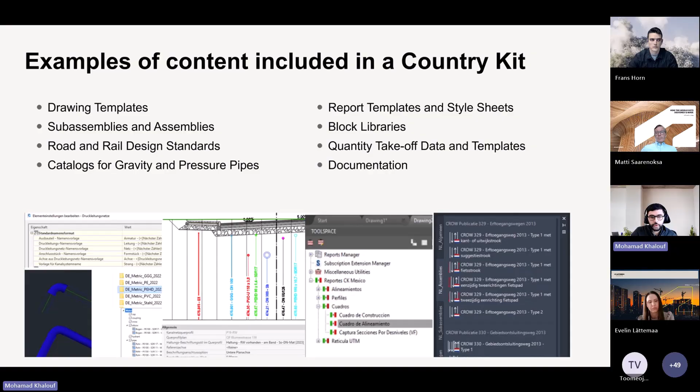Some examples of content that can be included in a country kit are drawing templates, which we have worked with in this country kit. It can be sub-assemblies and assemblies. It can be road and rail design standards. It can be catalogs, for example, for pipe networks and so on. And we are really happy to get your feedback on what would be most interesting for you to develop in the coming country kits and in this country kit.

So a country kit is a supplemental package that the user adds onto the core product. It is content files containing local engineering standards. And it's developed by external partners who have knowledge of the local market, which is important to make it as good as possible. It's not intended to fill any feature gaps in the core product, if there are. And it's not a language package, but it's more like content in the local language.

And this is the coverage of Civil 3D country kits worldwide. And we're very happy to now have developed something for Finland as well.

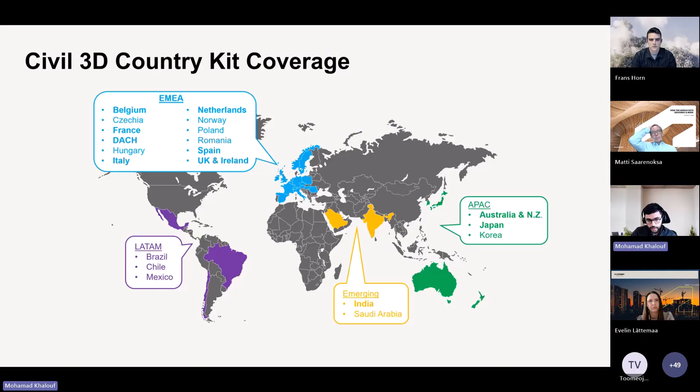In this release. So now after we understood about country kits, how these are implemented into Civil 3D, it's important to know that Civil 3D is part of the AEC collection where we have 20 different tools, including Revit, Docs, and some other software. Civil 3D basically is in the part of BIM infrastructure in this category with InfraWorks, Navisworks and Docs, for example, and some other tools are spread through all these different categories.

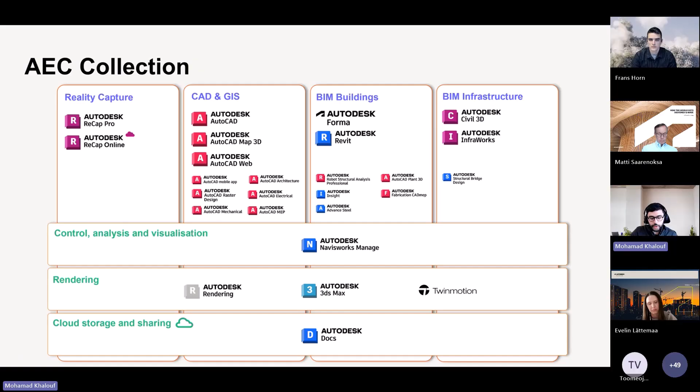And I'll be talking about Docs a little bit more, where you can share your files and you can store your files and communicate with your team members and so on. So this is important to know as well. AutoCAD, AutoCAD Map 3D, and Civil 3D are built on top of each other. They are built on the same base, on the same foundation. So AutoCAD and AutoCAD Map are included in Civil 3D. You have more functionalities in Civil 3D.

So Civil 3D is a civil engineering platform for infrastructure, and it consists of smart Civil 3D elements like alignments for the roads or rails, profile, surfaces, etc. And why is this important to understand? Because when we say smart, it's because you can include, for example, Finnish design standards into your alignment for the road, to make it compatible with the market. And this will, of course, automate the work.

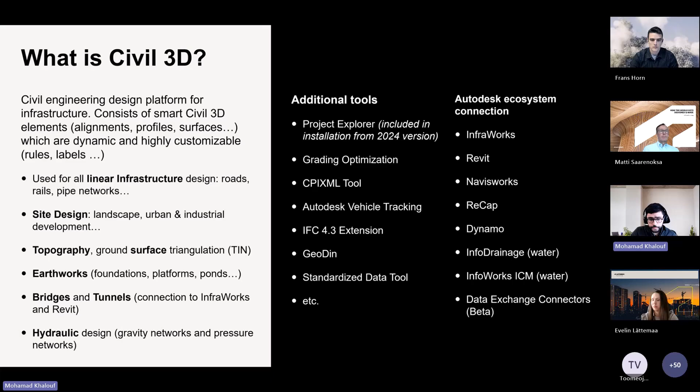So Civil 3D is used for linear infrastructure like roads, rails, pipe networks, for site design, for topography, the surface, earthworks, and so on. And we have additional tools in Civil 3D, as you can see, like Project Explorer, grading optimization, IFC 4.3 extension. These help you a lot in your workflows. So I wanted to mention some of the tools that might be interesting for Finland because there are many tools. For example, you have Dynamo for visual programming.

If you are a developer, you have the .NET options. There are different extensions for Civil 3D, and the CountryKit is one extension. You have vehicle tracking, grading optimization, and other tools. The Content Catalog for Civil 3D is where you save all your blocks, like a library.

Another important connection to Civil 3D is the Autodesk Connectors for ArcGIS. This is very important for civil engineers to know the project's existing conditions, how it looks in your project. That's why we have integrated BIM, which is Civil 3D, with GIS. This way, you can connect the Autodesk Construction Cloud or Docs with ArcGIS, which is the Esri part, the GIS part—so BIM and GIS together. I wanted to show you how it looks, if it could be interesting for your projects.

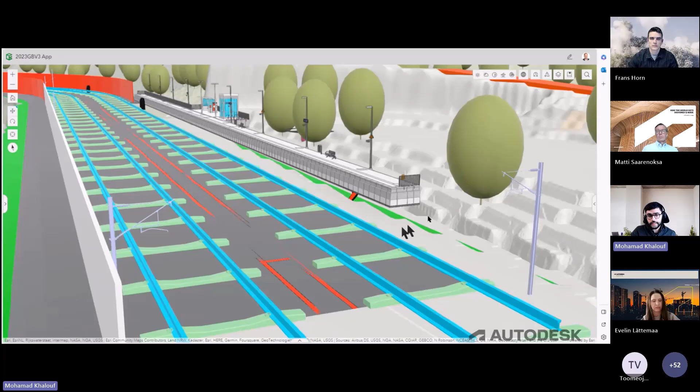So this is a GeoBIM application. It contains the vegetation, the parcels, the surfaces, the utilities. To the right is Docs, where you share or store your files, and you can access it directly from GIS. So you're connected in both GIS and BIM.

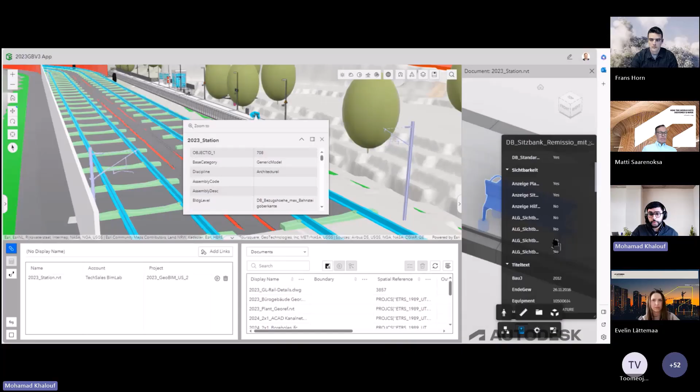The BIM contains all your BIM models, and you can see all of the properties included. You get all the information here, and the links as well.

One more important tool that might be used for the Finnish market is the Structure Details tool. This is included in the Swedish CountryKit and the Norwegian CountryKit. If this is something you would like to use for Finland, please vote at the end of the presentation on Slido. Basically, if you have a pipe network or a structure, it will give you a drawing ready for the construction site, with all the information needed for the construction site and installation.

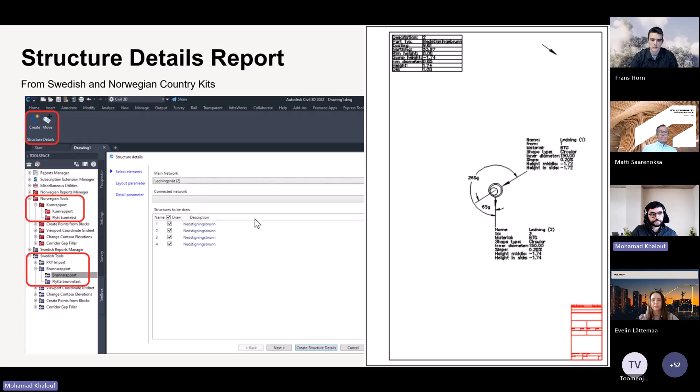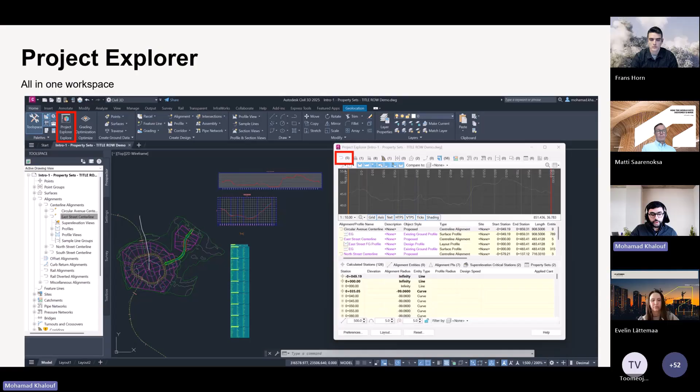Also, an important tool included in Civil 3D since 2024 is the Project Explorer. Here you can create reports and edit. It's an all-in-one workspace—you can access it from here. In this example, we have five different alignments. If I wanted to do it the usual way from Toolspace, I would need to go to the exact alignment, to the exact profile. But in Project Explorer, you can see it's an all-in-one workspace.

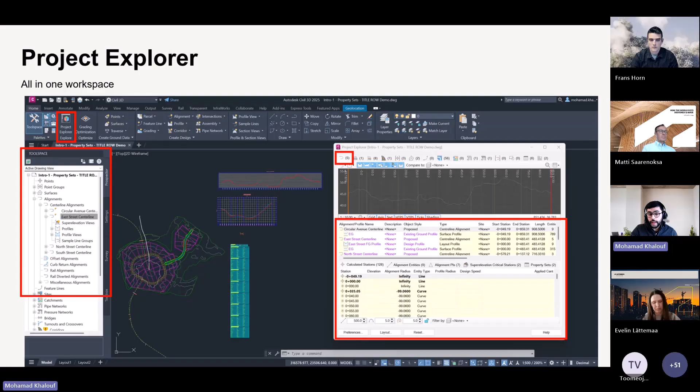Basically, you can report on whatever entities you want. You can make reports like PDF or Excel files, customized to your company. You do not need any other extensions—it's included in Civil 3D, but many people don't know about it. And this gives you better understanding because everything is included in one place, easily.

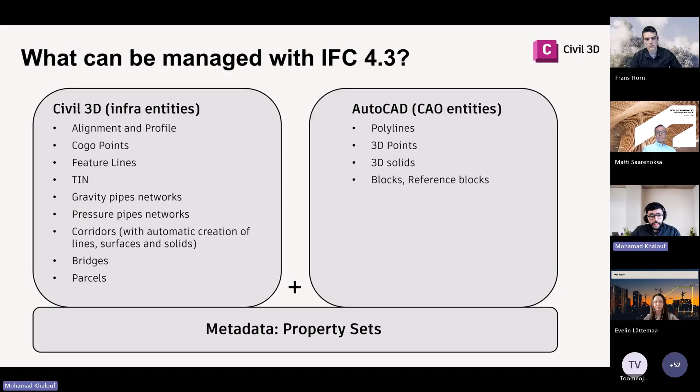One more thing included in Civil 3D that might be interesting for Finland is IFC. To give background, when IFC 2x3 started, we only had IFC for building, but then with IFC 4.3 we got IFC for railway, road, marine facilities, and tunnel in 4.4. These are the entities that can be included in IFC 4.3. You can now export alignments, profiles, Cogo points, feature lines, TIN surfaces, and so on. You also have some AutoCAD entities like polylines, 3D points, 3D solids, and so on. Metadata is included in all of this, which is the property sets—all the information about your objects.

So this was my part of the presentation. I just wanted to show you how to access the beta. Now we are in the beta phase, the testing phase, where we would like you to test it. It is in the Autodesk Infrastructure Futures.

If you let me share my screen, I hope you see it. It is in here—I will share the link with you. You need to sign in or create an account to go into here. Sign in very easily, as I will show you where the beta is now included.

We released this just today or yesterday, so it's taking some time. If I go to Autodesk Infrastructure Futures and then Content, you should come to the CountryKit, and you should be able to download it. As you can see, you have the documentation about everything that's included, and you have the content here. This is the documentation, and this is how it looks. Please go ahead and take a look.

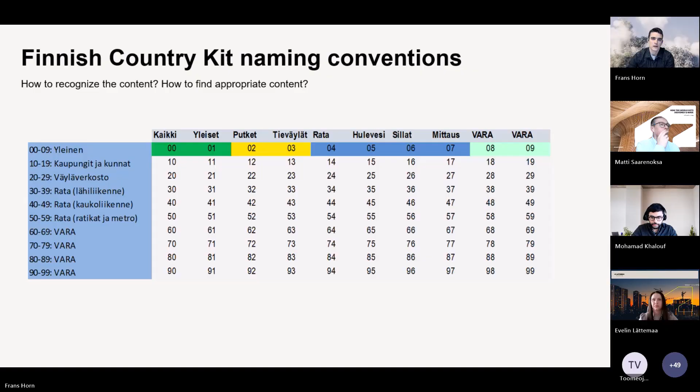Mohamad sanoi, että Civil 3D:tä ei voi käyttää ilman AutoCAD-toiminnallisuutta, tai oikeastaan hän sanoi, että se on rakennettu AutoCADin päälle, ja se tietenkin tarkoittaa, että kaikki mikä on AutoCADista, niin toimii Civil 3D:ssä. Käänteisesti se tarkoittaa, että meidän täytyy myös määritellä tiettyjä perussääntöjä näihin mittoihin, teksteihin, blokkeihin, ja niin päin pois. Siinä sisällössä on myös sellainen auttava kokoelma AutoCAD-sisältöä.

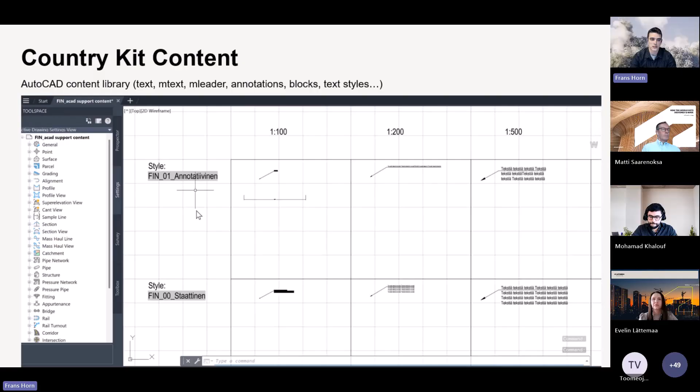En tule esittelemään kaikkia objektityyppejä tässä esityksessä, mitä on kehitetty, mutta pintapuolisesti joitain näistä ja sitten demossa sen, mitä ehdin.

Pintojen osalta, en nyt uskalla valehdella, kuinka monta eri pintatyyliä oli, mutta niitä on 10 ja 20 välillä. Nämä on sellaisia yleishyviä esitystapoja pinnoille.

Niissä on tosiaan kaksi eri lähestymistä. On se, missä on by block, eli kaikki objektit menee sille layerille, mille sen pinta-objekti on sijoittanut, ja sitten on sellainen esivalmistelluilla layereilla varustettu tyyli, missä pystyy esimerkiksi pinnan käyriä korostamaan eri viivatyypeillä tai eri viivapaksuuksilla, jos kokee tämän tarpeelliseksi.

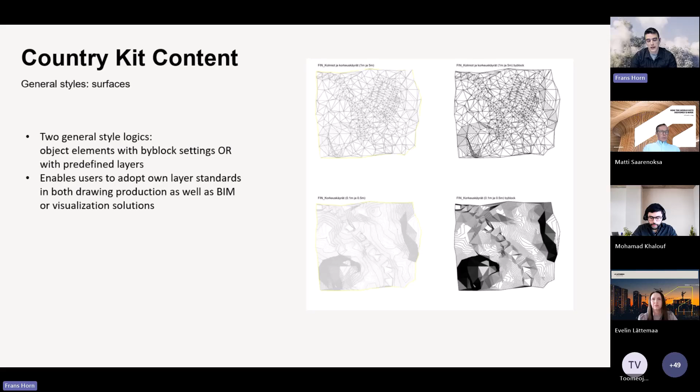Ja kuten aikaisemmin totesin, tämä lähestyminen minun näkemykseni mukaan tukee sitä, että IFC-eksportit yms. on vähän jäsennellympiä. Seuraava kokonaisuus on nämä peruslinjageometriat, eli puhutaan alignment-objekteista ja niihin liittyvistä section lineista.

Näitä tyylejä ei ole kovinkaan montaa ja se on harkitusti tehty. Idea näissä on ihan sama kuin aikaisemmin, eli siellä on esitystapoja tai tyylejä, jotka eksportin myötä käytännössä käyttäytyy kuten AutoCADin polyline. Ja sen lisäksi siellä on mittalinjatyyli, jossa mittalinjan eri osat on korostettu eri väreillä.

Sen sanon vielä tästä lähestymisestä, että ne värit, mitä tässä on, ne on tietenkin konsultista ja tilaajasta riippuvia, miten ne haluaa esittää. Ja sen layer-järjestelmän mukaan, mitä olen käyttänyt tässä, pitäisi olla hyvin helposti muokattavissa niin, että jos joku tietty konsultti tai tilaaja haluaa ne jossain tietyssä muodossa tai tietyllä värityksellä, sen pitäisi onnistua.

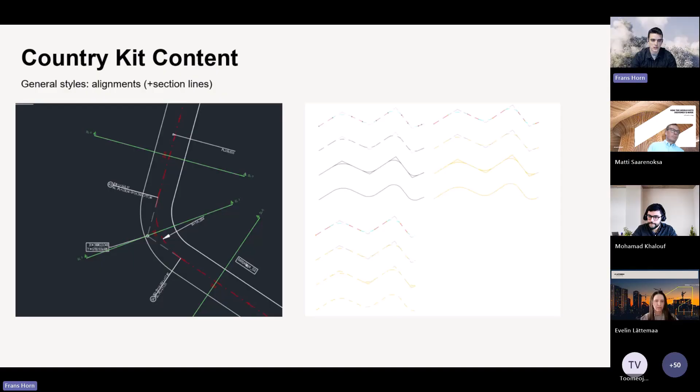Sitten puhutaan pituusleikkausnäkymistä. Nämä on sellaisia oman kokemukseni myötä - tämä on yleensä se, missä uusi Civil 3D-käyttäjä on heti sillä, että tämä ei näytä tutulta, tämä ei näytä suomalaiselta. Olen pyrkinyt valmistelemaan yleishyvät pituusleikkausnäkymät Civil 3D:stä, joiden ei pitäisi heti aiheuttaa sellaista kauhureaktiota.

Ne, jotka ei tunne Civil 3D:tä, ei välttämättä tiedä, että ne on reaktiivisia tai dynaamisia objekteja, mikä tarkoittaa, että kun niitä tyylejä muuttaa, niin esitystapa muuttuu. Ja olennainen osa tästä on katusuunnittelussa esimerkiksi tuttu tällainen pystyakselin korostaminen.

Ja tällaisia tyylejä, missä pystyakselia on korostettu - olikohan se nyt 2, 5 ja 10 kertaisesti - löytyy siitä template-kirjastosta. Tässä kuvassa on 6 identtistä pituusleikkausnäkymää samasta mittalinjasta, ja niillä on kaikilla eri esitystapa.

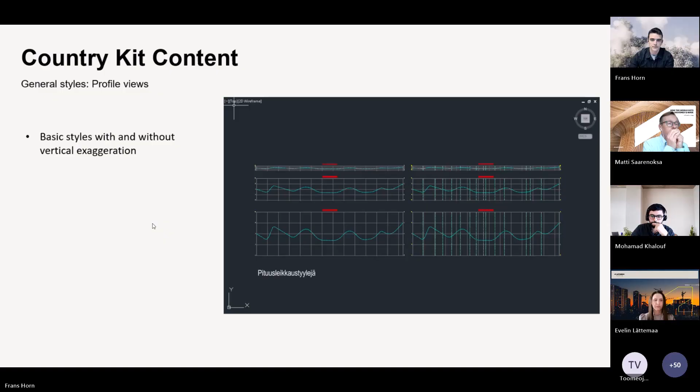Sitten päästään tasaustyyleihin, eli kun puhutaan tasauksista, se tarkoittaa Civil 3D-kielellä suunniteltua tasausta tai sitten mitattua tai pinnan ikään kuin käyrää. Näissä logiikka on ihan sama kuin mittalinjoissa, eli siellä on muutamia tyylejä, joissa suurin osa asetuksista on by block, mikä tarkoittaa, että ne käyttäytyy kuin polyline.

Ja tämän epäonnisen värivalinnan takia, ehkä tihrustamalla näette, tässä on sininen viiva, jolla on pistekatkoviiva, sininen viiva, jossa on yhtenäinen viiva, ja valkoinen viiva. Nämä on kaikki samalla tyylillä, mutta eri layer-asetuksilla ja eri viivatyyppiasetuksilla. Tämän pointti on tarjota mahdollisuus tehostaa piirustustuotantoa Civil 3D:n työkalulla.

Sitten vastaavasti löytyy tällainen suunnittelutyötä varten kehitetty tyyli, jossa geometrian eri tyypeillä on omat värityksensä. Ja ne väritykset on identtiset sitten mittalinjan esitystavan kanssa.

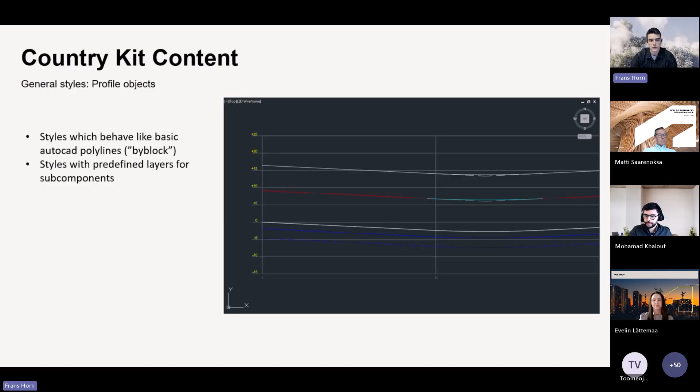Selkeä haaste tässä kehitystyössä Civil tai tämän CountryKitin kannalta on ollut putkikirjastot. Suomessa on tietty määrä esitystapavaatimuksia ja teknisiä määritelmiä, joita halutaan esittää piirustuksissa, ja niiden saavuttaminen perus Civil 3D-toiminnallisuuksilla on haastavaa, ei mitenkään mahdotonta, mutta haastavaa.

Ja peilaten siihen, mitä Mohamad kertoi maailmanlaajuisesti siitä, miten Civil 3D:tä käytetään, niin tosi moni markkina-alue on kehittänyt oman tällaisen niin sanotun pipe-katalogin, mikä tarkoittaa, että tällä tukitiedostolla, eli pipe-katalog, on speksattu, mitä putkia tällä markkina-alueella käytetään, mikä niiden nimi on, mitkä niiden ominaisuudet on. Se, mitä olen nyt kehittänyt tähän CountryKittiin, perustuu täysin siihen, mikä tulee Civil 3D:n asennuksen myötä.

Tällä disclaimerilla totean, että jos käytätte tätä pipekatalogia, osa näistä geometrioista, mitä se tuottaa, ei ole millintarkasti se, mitä putken määritelmä antaa ymmärtää. Mutta heitto ei ole merkittävä.

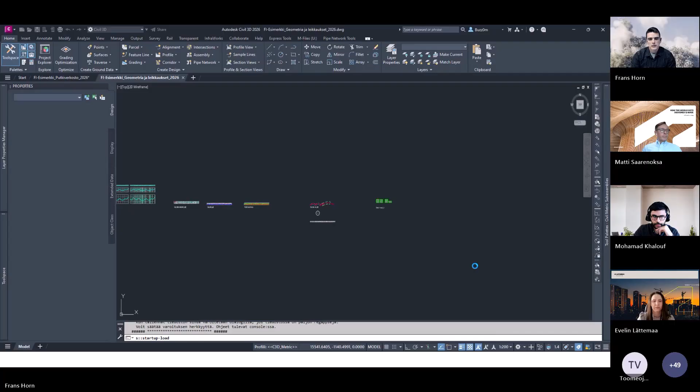Tämä on yleinen vinkki AutoCAD ja Civil 3D-käyttäjille, että täällä on kaikennäköistä mielenkiintoista myös muissa. Mutta kun asennus on onnistunut, löytyy tällainen FIN-hakemisto, jossa on FI-alkuisia esimerkkitiedostoja. Ensimmäiseksi avaan tämän geometrian leikkaukset.

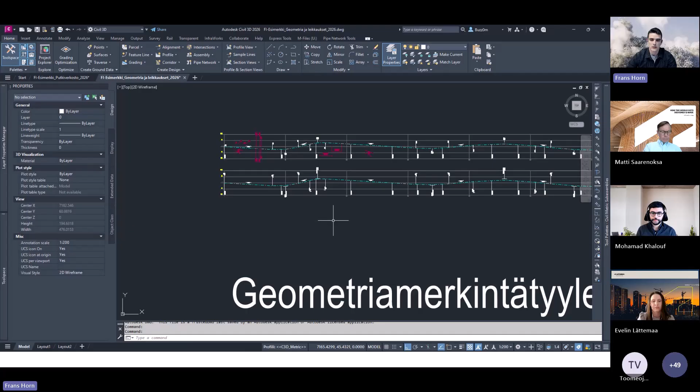Se, mitä tässä esimerkkitiedostossa on käytännössä, on sama sisältö, mikä oli mun slideissa. Täällä on mittalinjatyylit, pituusleikkaustyylit, merkintä-esimerkkejä siitä, miten näitä annotaatioita voi tehdä. Tasaustyylejä, sitten nauhatyylejä, mitä geometriaan liittyy, eli kun muokkaa jotain, niin nämä dynaamisesti muuttuu siinä. Sitten on näitä sample-lineja ja väylämalliesimerkkejä.

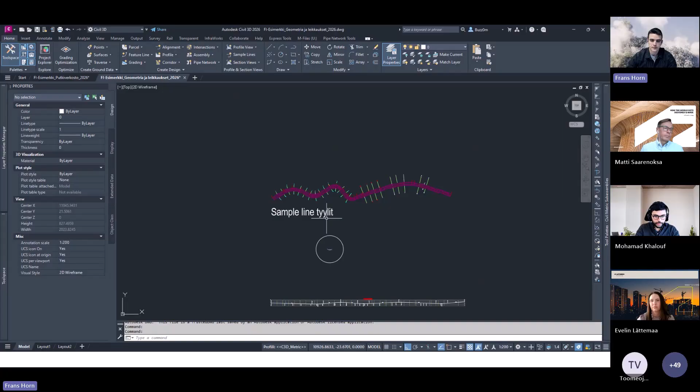Näin demomielessä skissailen tähän yhden uuden mittalinjan ja katsotaan, miten tämä kyseinen template toimii.

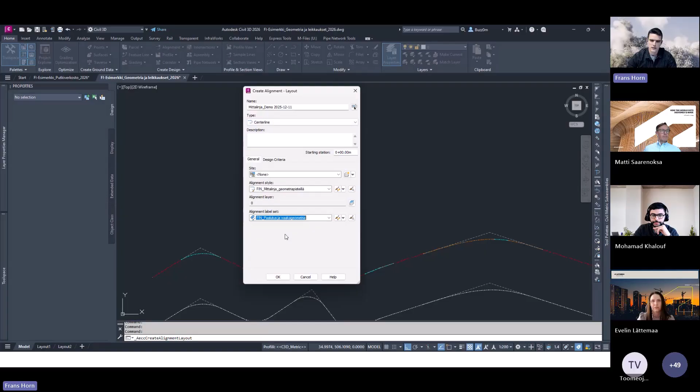Niille, jotka ei osaa tai ei ole vielä käyttänyt Civil 3D:tä, selitän, että tämä on se dialogi, millä mittalinja tai useimmat Civil 3D-objektit määritetään tai alustetaan. Määritän täältä, että mun tyyli, eli esitystapa on fin, mittalinja, geometriapisteillä, ja laitan että siinä on label-setti, eli mitä merkintöjä - se on paalutus ja vaakageometria. Asetin, että kun kliksuttelen tähän mittalinjan, se piirtää kaarteet tai siirtymäkaaret geometriapisteiden väliin.

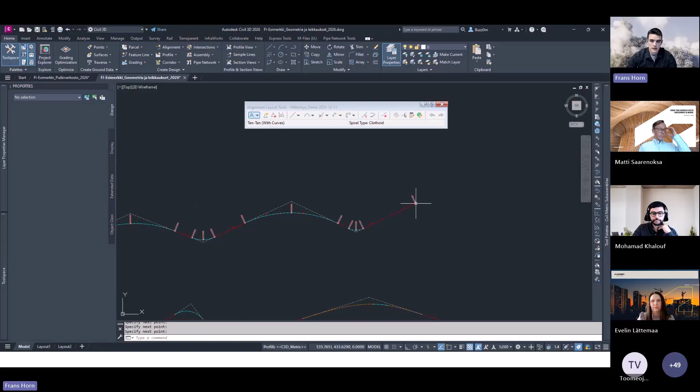Kun painan Enter, tähän lisää nämä annotaatiot, label-stylit. Viitaten siihen dynaamisuuteen, jos Civil 3D on tuntematon - nämä ei ole sellaisia kerran piirrettyjä juttuja, vaan ne dynaamisesti muuttuvat suunnittelun myötä.

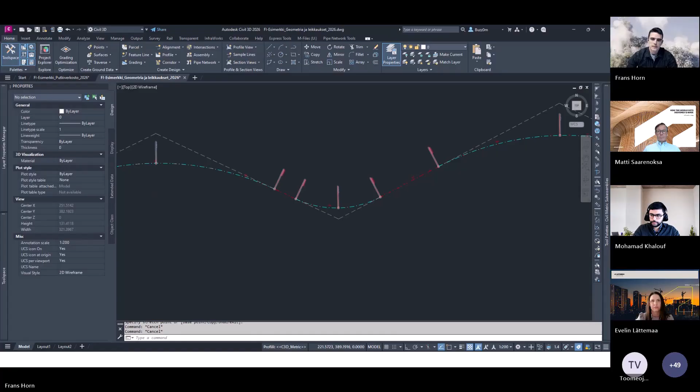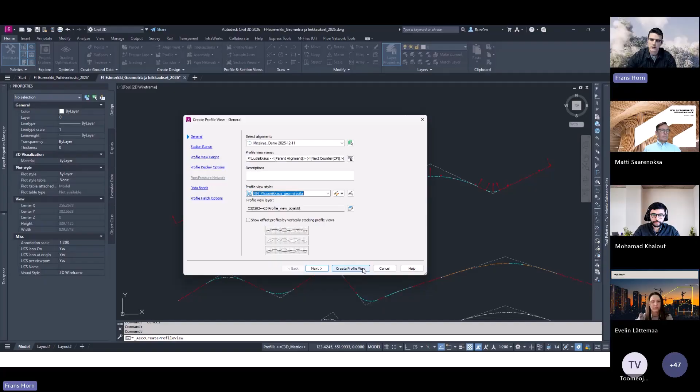Otetaan pituusleikkaus geom-viivoilla ensimmäiseksi esimerkiksi. Tässä tapauksessa pystyskaalaus on 1, mikä tarkoittaa, että pystyakselin skaala on tasan 1:1. Kun se muutetaan 10-kertaiseksi, niin luonnollisesti ruudukko muuttuu vastaavasti.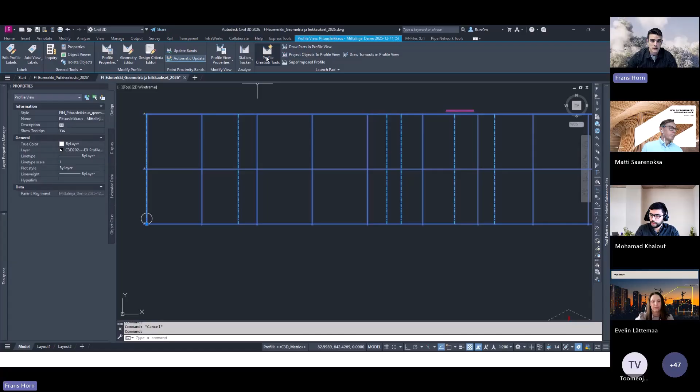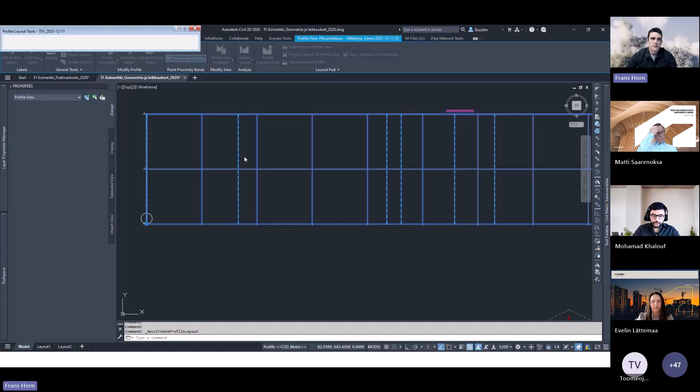Jotta päästään mallintamaan tai suunnittelemaan tasausta, pitää määritellä profile-objekti. Tämä dialogi on hyvin samanlainen kuin aiemmin nähty. Määritetään, että tämä on fin-tasaus, ja label-setti on fin-suunniteltu geometria. Painetaan OK ja klikataan jonkinlainen geometria.

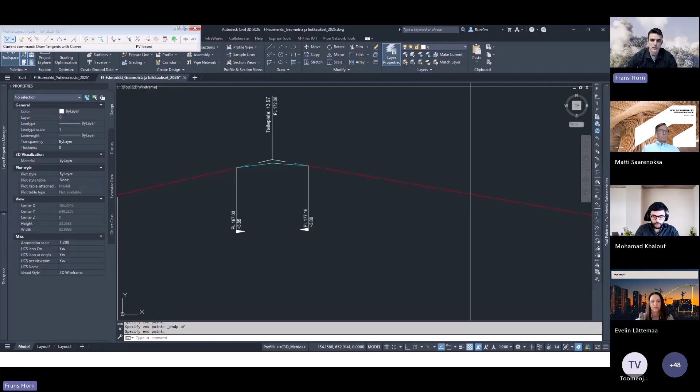Vastaavalla tavalla kuin vaakageometriassa, tähän tulee merkinnät jossain määrin tutussa muodossa, ja aivan kuten mittalinja, tasausviiva on dynaamisesti päivittyvä. Jos fontit vaikuttavat liian pieniltä, viittaan taas Civil 3D:n toiminnallisuuteen - nämä ovat dynaamisia, joten kun muuttaa tulostusmittakaavaa, sisältö muuttuu samalla.

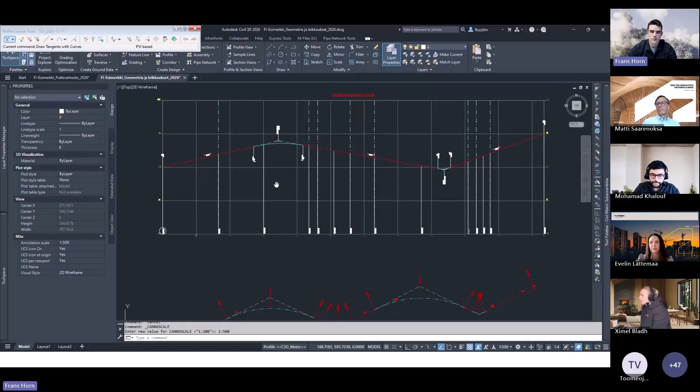Tyylit tehdään joko suunnittelua tai tulostamista varten, ja tämä tyyli on sellainen, mitä voisi käyttää suunnittelussa. Mutta jos haluaa tulostaa esitystavan, missä exportin myötä viiva tulee olemaan samalla layerillä kuin tässä - eli käyttäytyy kuin AutoCAD Polyline - silloin tulee käyttää näitä ByBlock-nimisiä tyylejä.

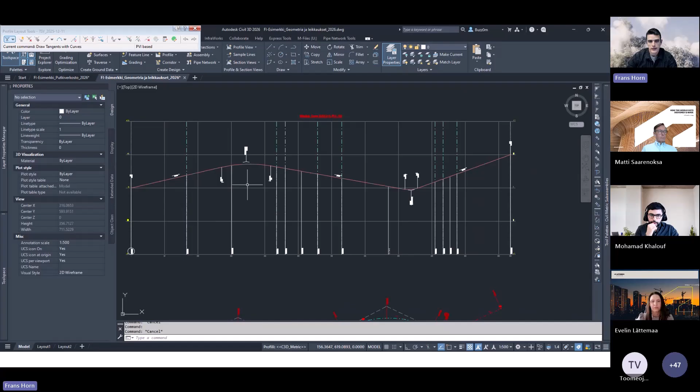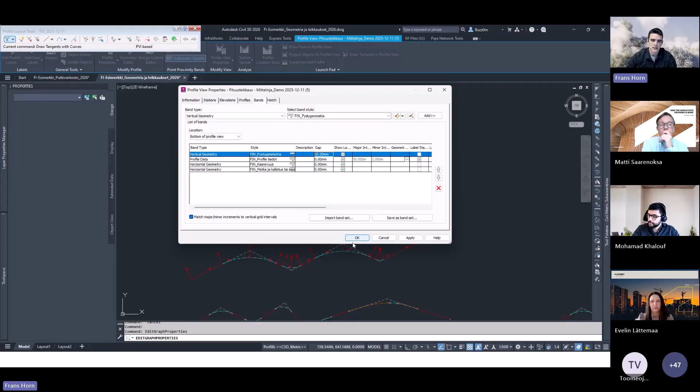Seuraavaksi näytetään nauhat, mitä pituusleikkauksen alle saa. Importoidaan tällainen kokoelma nauhoja: fin, vaaka ja pystygeometria. Tästä on ensin valmisteltuna 4 tällaista mittalinjatyyliä, jotka tulevat esimääritellyllä etäisyydellä, ja näitä voi halutessaan säätää.

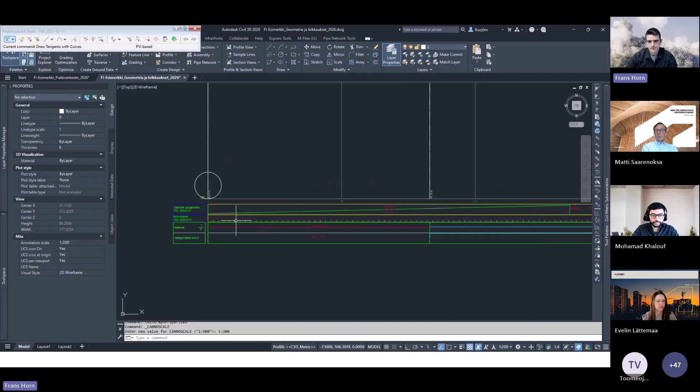Tämä menee tukkoon tulostusmittakaavasta johtuen, mutta nämä nauhat ovat niitä, jotka on tunnistettu tarpeellisiksi rakennusalalla tai infrarakennusalalla. Eli pystygeometriaa, korkeusasemaa, kaarevuutta ja vaakageometrian sädettä ja näin. Tällaisia vastaavia nauhoja löytyy myös putkiverkostoille.

Siirrytään tässä vaiheessa pintatyyleihin - katsotaan, onko tämä yhtä hidas. Ei, nyt se oli vähän nopeampi. On vielä 5 minuuttia aikaa, joten kiihdytetään vauhtia. Eli pintamallit.

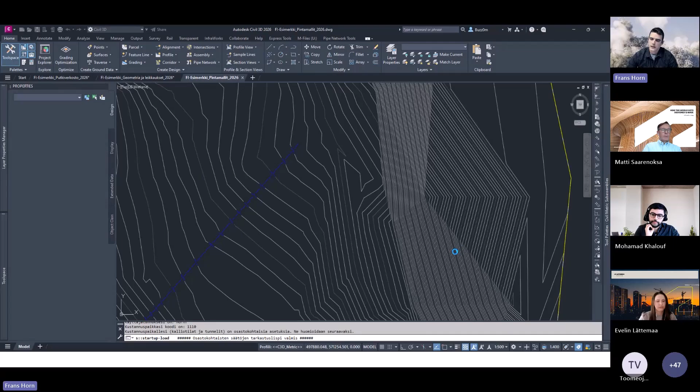Tämä on hyvin nopea esimerkki siitä, mitä kaikkea eri pintatyyliä tässä on esitetty, ja yritetään nopeasti selittää miksi. Kun zoomaa ulos, näkee kokonaisuuden - tässä on lähemmäs 20 tyyliä, erinäisiä yhdistelmiä siitä, miten Civil 3D:ssä voi esittää pintoja.

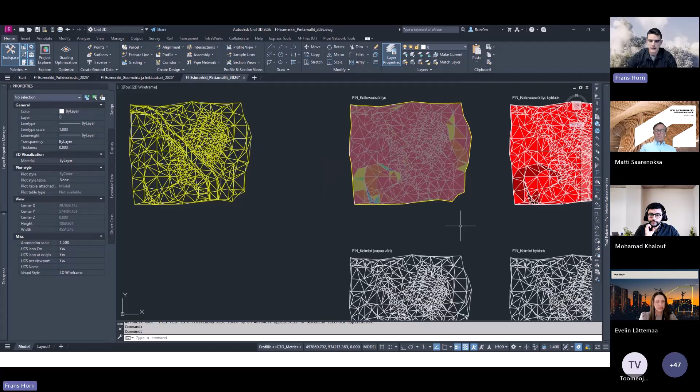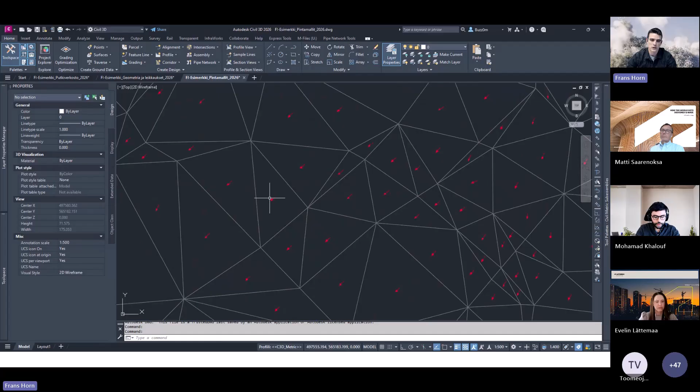Näitä on aika uskomaton määrä eri komboja, mitä pystyy tekemään. On kolmiot ja käyrät, tai kolmiot ja kaltevuusnuolet, tai ulkoreunat, sisäreunat, pelkkä ulkoreuna, pelkät kolmiot. Puhuttiin aikaisemmin kaltevuuden osoittavista nuolista, ja sitten tällaisia värityksiä, mitä ikinä haluaakaan käyttää. Ja sitten tyyli, jossa ei näytetä yhtään mitään.

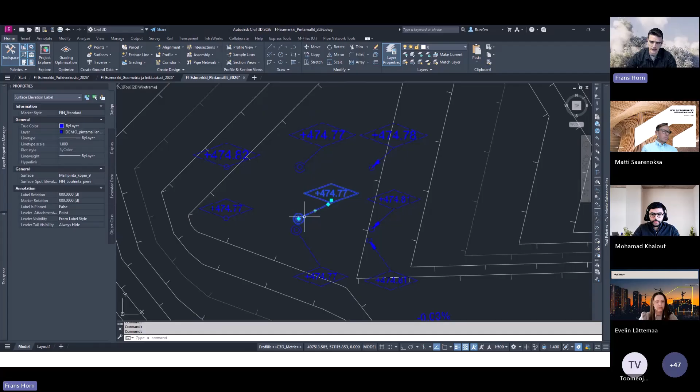Pintoihin liittyy aina tai useimmiten tällaiset annotaatiot, esitystavat, merkinnät. Esivalmisteltuna on joukko pistemerkintöjä - dynaamisesti käyttäytyviä pistemerkintöjä louhinnalle, kaivuulle, ja sitten yleisesti XYZ-tyylisiä esitystapoja.

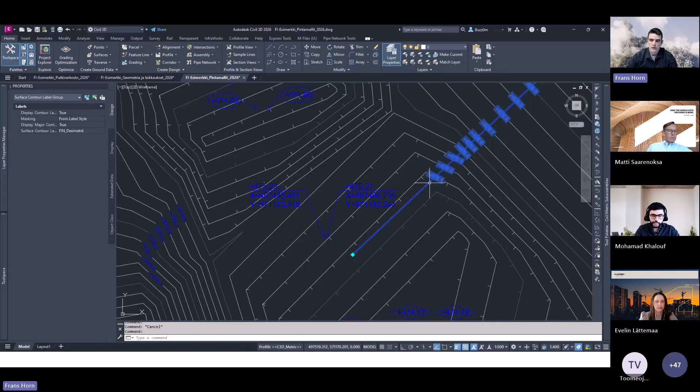Käyrästöjen osalta on desimetrin tarkkuudella, metrin tarkkuudella, ja on jopa senttimetrit täällä. Jos jostain syystä haluaisi tarkastella hyvin tarkkaa tasausta, senttitarkkuudella sen pystyisi tekemään.

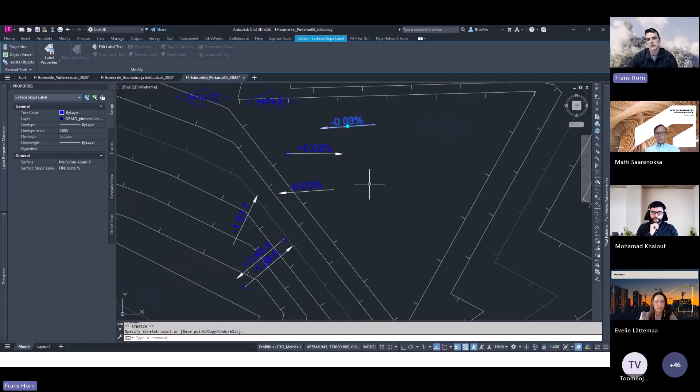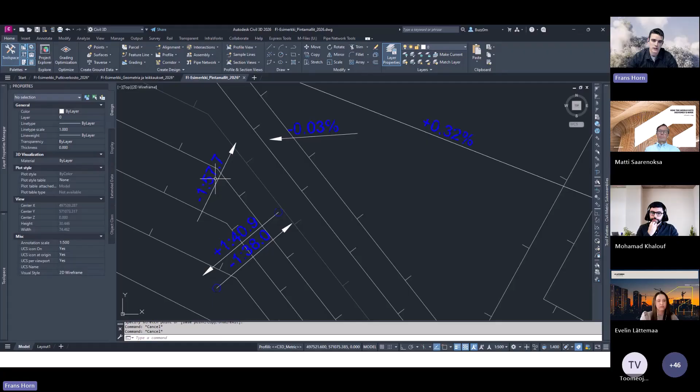Kaltevuuden osoittamisesta - tämä jakaa suunnittelijoita - on esitys, missä nuoli osoittaa aina siihen suuntaan, mihin vesi virtaisi. Vaihtoehtona on se, että suunnittelija pystyy speksaamaan, että tästä pisteestä johonkin toiseen pisteeseen - silloin se on tällainen 2 pisteen mittatyyli. Nämä erottaa siitä, että toisessa on pallo yhdessä viitepisteessä. Kaltevuus on osoitettu suhdelukuna, eli 1 suhde johonkin, ja sitten prosenttilukuina 2 desimaalin tarkkuudella.

Viimeiset minuutit käytetään putkiverkoston aineiston näyttämiseen - tämä on väitetysti haastavin osa Civil 3D:stä. Kun haluaa esittää suunnitelmiaan Suomen markkinoilla tutulla tavalla, se vaatii jumppaa Civil 3D:ssä. Tänne on nyt luotu sellaiset esitystapasäännöt, joilla pystyy auttavasti suunnittelemaan.

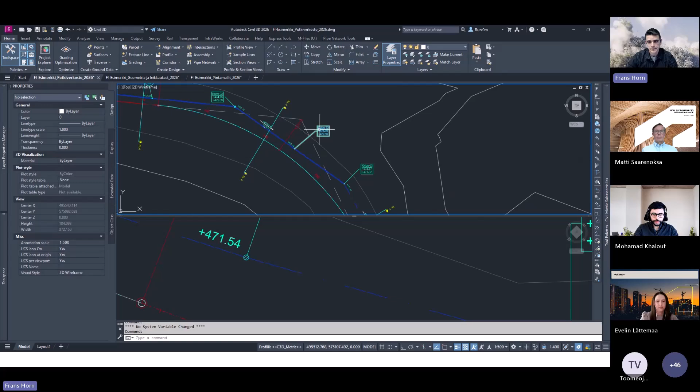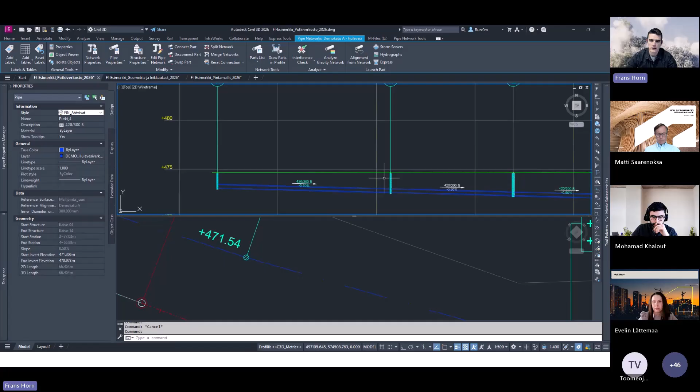Pituusleikkauksissa on tikkarityyliä, jonkinlaista merkintää kaltevuudesta tai korkeusasemasta, ja alla tarkempia speksauksia kaivojen kansistojen korosta ja pohjan korosta. Tässä käytettiin se aika, mikä oli varattu, mutta kannustetaan selaamaan näitä ja kriittisesti keräämään kehitysehdotuksia, mitä voitaisiin tehdä jatkossa.